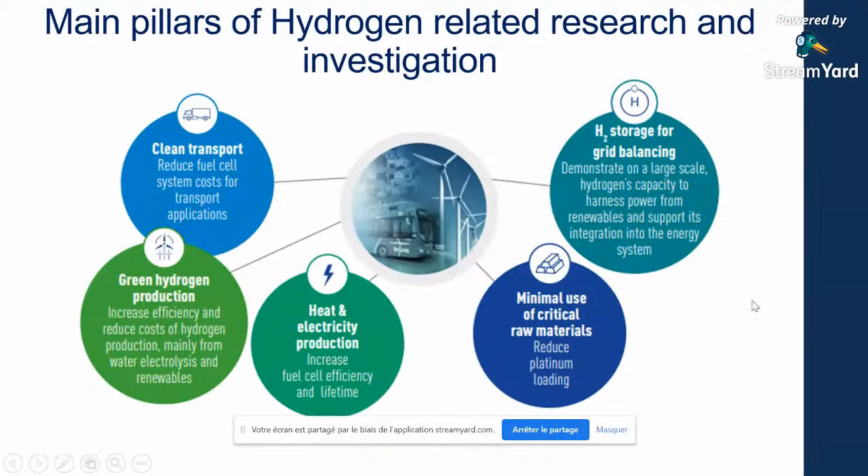So in this webinar, you will see different uses of hydrogen. I will start to introduce in this first part of the webinar a framework overview of renewable energy integration and green hydrogen as a long-term storage. And then I would like to present to you an overview of green hydrogen projects. So let's start with the framework overview.

As you know, in order to achieve the 2 degrees goal, the renewable energy integration will be expanded. There are some studies that are showing that the renewable share of global power generation is expected to grow to 86% in 2050, mainly coming from PV and wind.

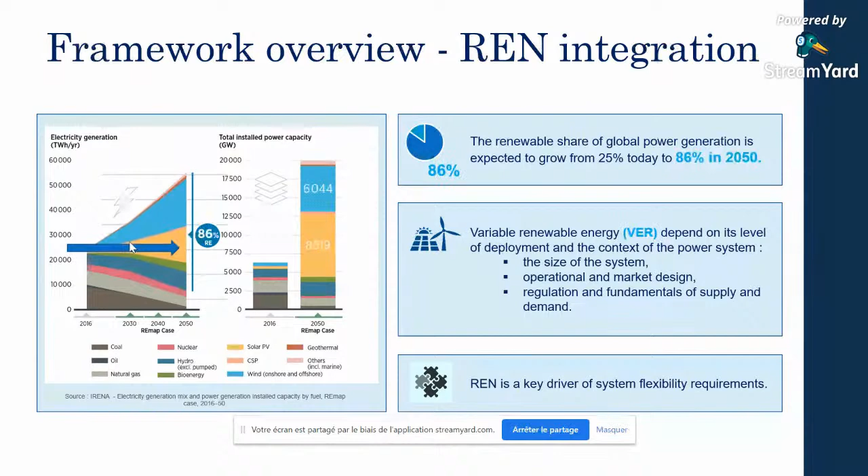And this variable renewable energy depends on its level of deployment and the context of the power systems. For example, the size of the systems, operational and market design, regulations, and fundamentals of supply and demand. So as you can see, we have a new challenge to face in order to support the renewable energy integration.

So there are some studies that propose to categorize the renewable energy integration in 6 phases, where in phase 1 and 2, there is not expected a huge impact, but after phase 3, we need to invest in flexibility to prioritize the different measures to support these systems and to identify relevant challenges and implementation appropriate to these measures.

For example, there are some studies that are showing that countries that are already in phase 3 are presenting a renewable energy surplus in some periods of time, for example, during spring, of 25%. So really we can see that it's important to start to take actions over this kind of process. But how can we act?

Well, as you can see, if we increase the renewable energy integration, we will be advancing in the different phases where we need to provide flexibility. But sometimes we are talking about hours, days, or sometimes we are talking about months or years. So depending on that, there are different levels of decision making that I would like to present to you in these 3 words. Who is the typical decision maker, for example, energy minister or system operators?

How is the category of the intervention, for example, policies that are making market regulations. And finally, what can we do? How can we do it? It is with different assets that we are going to act. And it is here that I would like to present to you the concept of energy storage. And I propose to you in this webinar to focus on this part of what.

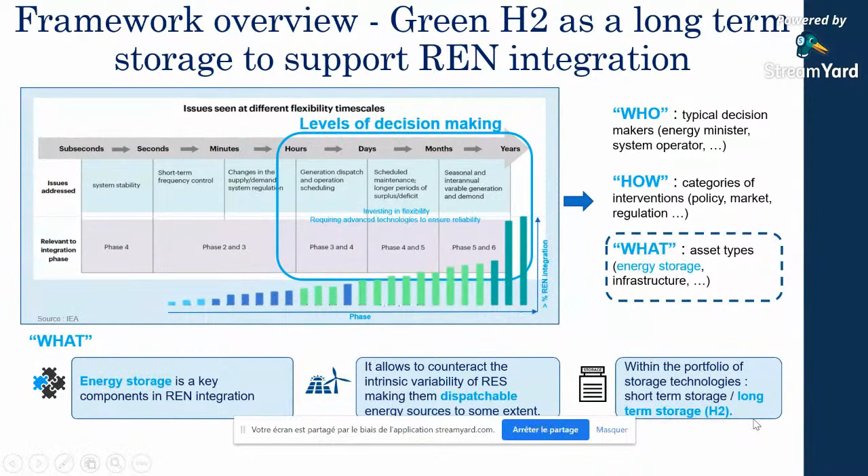And it's here in long-term storage that I would like to present to you the part of the hydrogen. So let me introduce you to this picture. You can see that you have different technologies that you can utilize in order to store energy. If we are talking about seconds, minutes, and hours, you can see that clearly you can utilize batteries. But if we are talking about weeks or months, we can utilize hydrogen as a long-term storage.

Long-term storage of a large surplus amount of electricity requires a new type of storage, as you can see, and we are introducing concepts of chemical storage in the form of hydrogen. Because of its relatively low specific weight and high energy density, hydrogen is an excellent energy carrier. And it's really important to understand that, because some forecasts are showing that in 2050, hydrogen from renewable power will translate into 5% of the total final energy consumption.

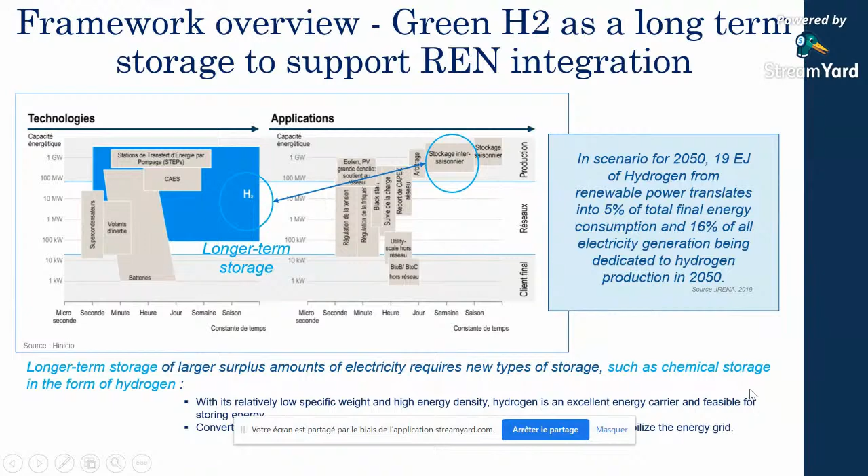So now that we understand the concept of hydrogen and green hydrogen produced from renewable energy, in order to valorize the renewable energy surplus, I would like to present to you a project overview of green hydrogen long-term storage. So we are going to discuss three aspects: technical challenge, hydrogen demand, and business model.

So in the first part, the technical challenge, we need to understand in which phase we are of variable renewable energy integration. After that, we need to understand the high-level system design that we are going to have. For example, how many megawatts of electrolyzer, how many watts we need to store from renewable energy, in order to optimize the electrolyzer running hours.

For example, here I can present to you a little example. Let's say that you have a system where the renewable energy surplus that you need to absorb is going to be a little bit over-dimensioned. That means that some part of the energy you will absorb in a short time in a battery during the day, for example, and you can also utilize it to feed the electrolyzer to produce hydrogen.

And during the night, for example, you can feed the electrolyzers with the battery and also with wind. And you can optimize the utilization factor of the electrolyzers during the whole year. And it is this profile of hydrogen production that you can see, for example, here.

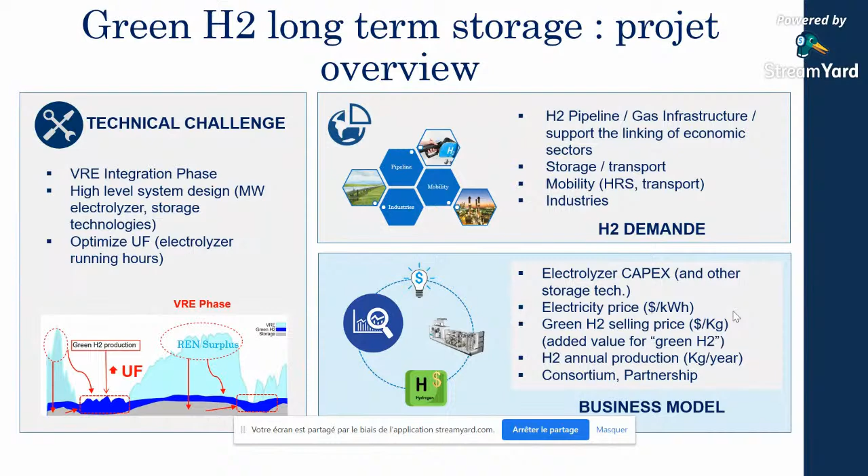In this case, this kind of process nowadays is supported by partnership consortiums or subsidies from the government.

So the key takeaway that I would like you to have in mind is that we are entering a world where renewables will make up an increasing share of our electricity. So the challenges are clear. We need to act in order to support renewable energy integration. We need to identify in which phase of these six categorizations we are in order to know how we can act. Hydrogen, with relatively low specific weight and high energy density, is feasible for long-term energy storage.

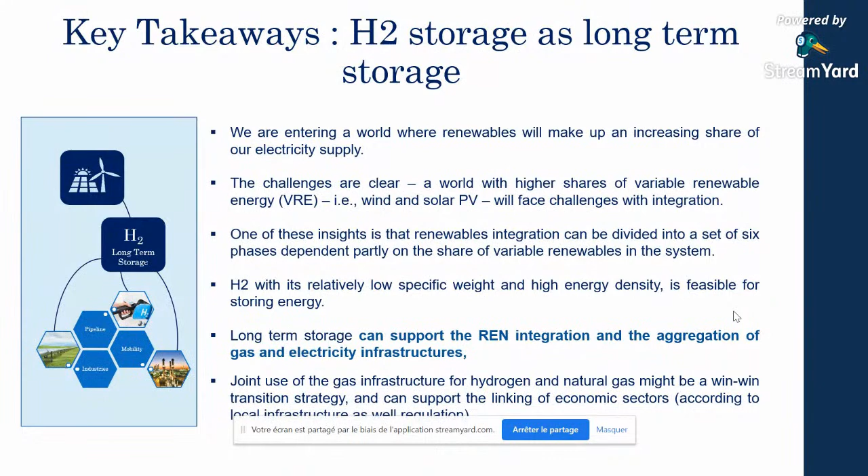As long-term storage, it can support renewable integration in the aggregation of gas and electricity infrastructure. And finally, joint use of the gas infrastructure for hydrogen and natural gas might be a win-win in this energy transition. As you can see, there are many demonstrators starting to grow up, and I would like to invite you to visit these sources if you want to know more about this kind of green hydrogen project.

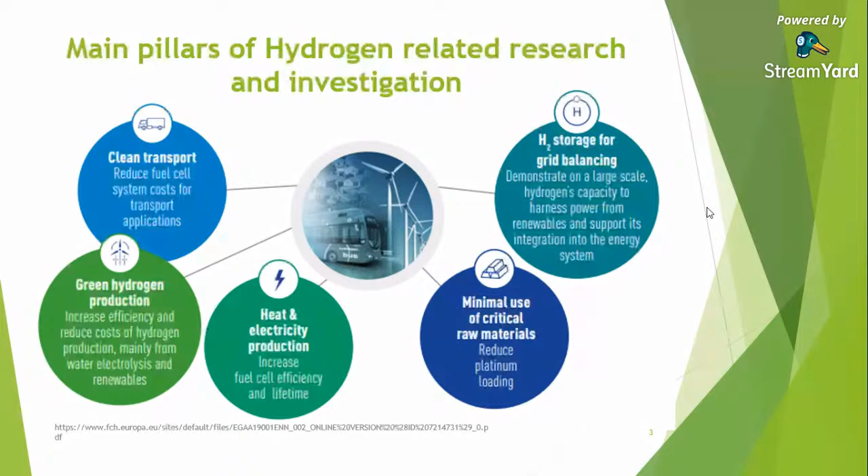As Rocio presented before, there are some main pillars of hydrogen-related research, investigation, and of course applications. I'm going to focus now on two pillars, clean transport and heat and electricity production. The other topics were covered by Rocio already and Fatima in the previous webinar. So let's start with the transport pillar: cars, buses, heavy duty, and all related refueling infrastructure for fuel cell vehicles, material handling vehicles, maritime applications, train applications, and planes. I will give you small examples of each of these applications and how they are actually working in the world.

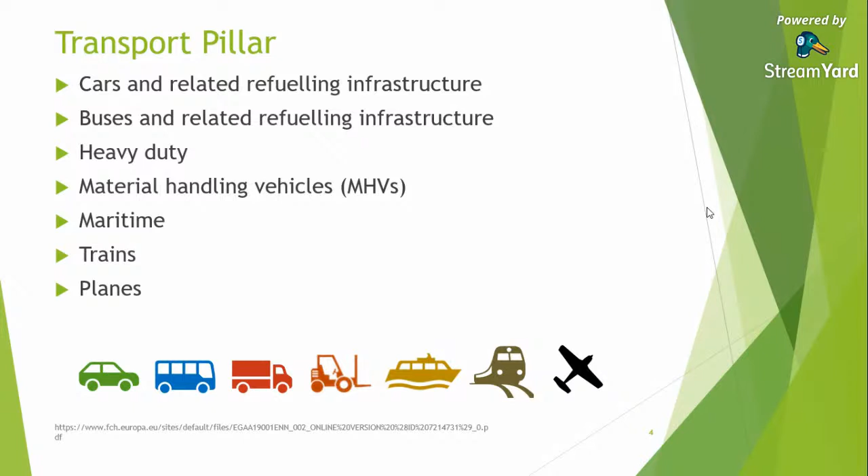Related to the transport pillar, many people believe that hydrogen is a competitor of electrical vehicles. In this graph, we have an overview of the range of application of each powertrain technology. Fuel cell, battery electric vehicles, plug-in hybrids are not competing with each other, but complementing each other to fulfill the full range of applications that have been fulfilled by fossil fuel vehicles. For a short range or small vehicle size, electrical vehicles have the most efficient operation, but for a bigger range or bigger vehicle size, you introduce hybrids or fuel cell vehicles.

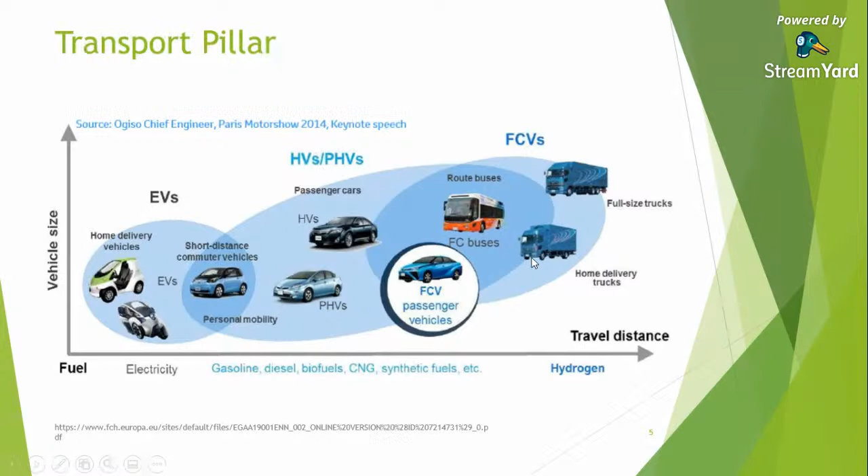Here we can see, as we discussed in the previous webinar, the competitiveness of the fuels. Here you can see the weight energy density and the volumetric energy density of hydrogen, batteries, and fossil fuels. If we talk volumetric energy density, fossil fuels are superior. But if you check the weight energy density, hydrogen has the better density. That's why we are betting on it. And for this reason, for big or heavy duty applications, hydrogen is quite competitive.

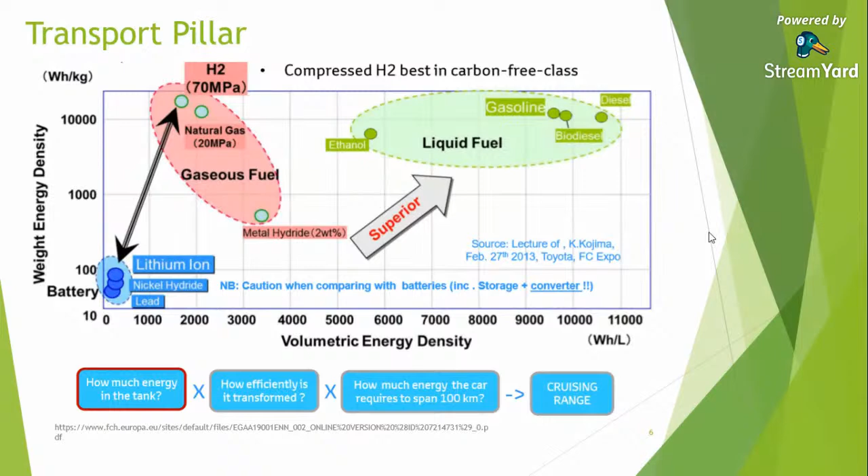A small overview of a fuel cell vehicle. This is the architecture of a fuel cell vehicle. It is not something that was reinvented. It's built on the hybrid architecture. The only difference is that we replaced the combustion engine with a fuel cell stack, and the gasoline or diesel tank with hydrogen tanks.

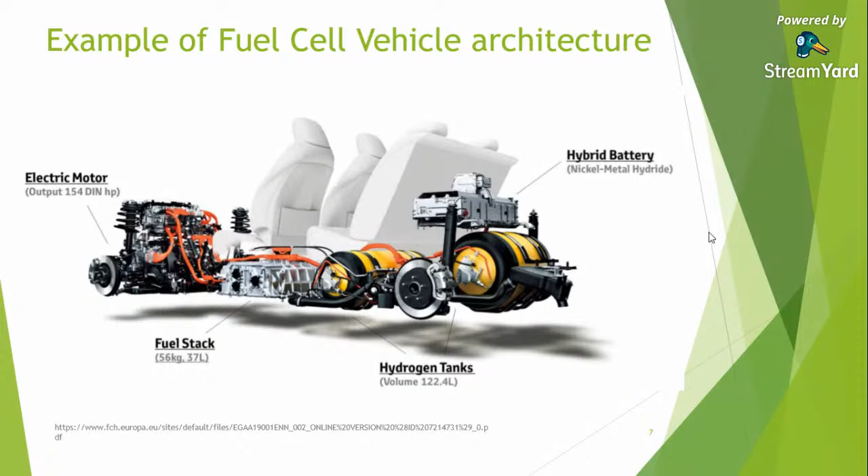Hydrogen infrastructure, all related to hydrogen refueling stations. This is an overview of how it's been accelerating for the past 5 years in countries betting on a hydrogen society. In 2015 there were already 40 hydrogen stations in California, 100 in Japan, and Germany had 50. The target for these countries in the years to come is to drastically increase the number of stations in order to deploy the technology faster in different parts of the world.

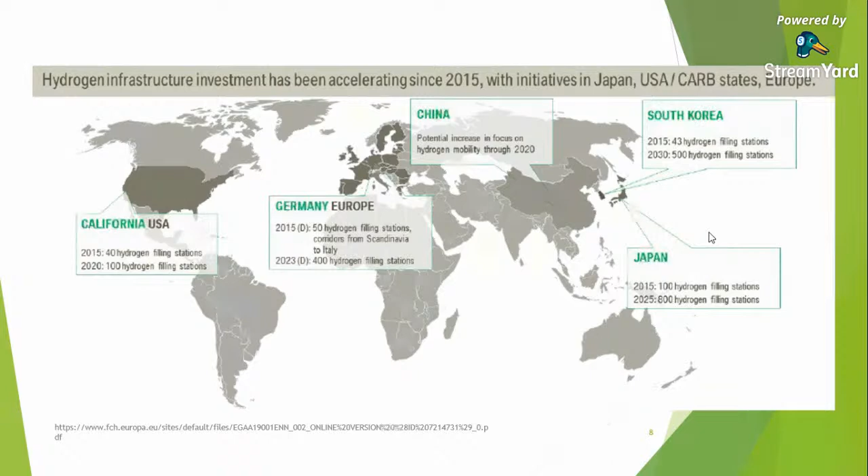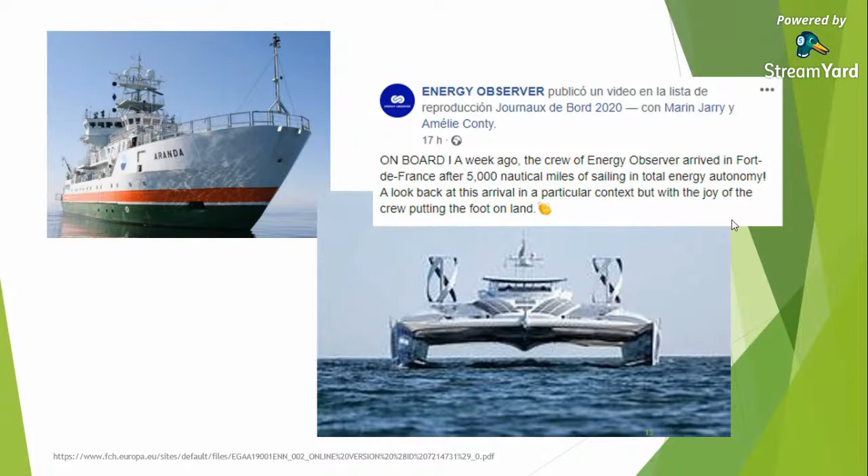Okay, so that was the transport pillar. Maybe I forgot to show the train, but there is currently also a train, the Coradia train in the Netherlands. It's by Alstom. It was released past March 7 to the public. It has been tested on the rail, and the performance of this fuel cell train is the same as the performance of traditional trains. So it's again ready to work and to compete with the existing technologies.

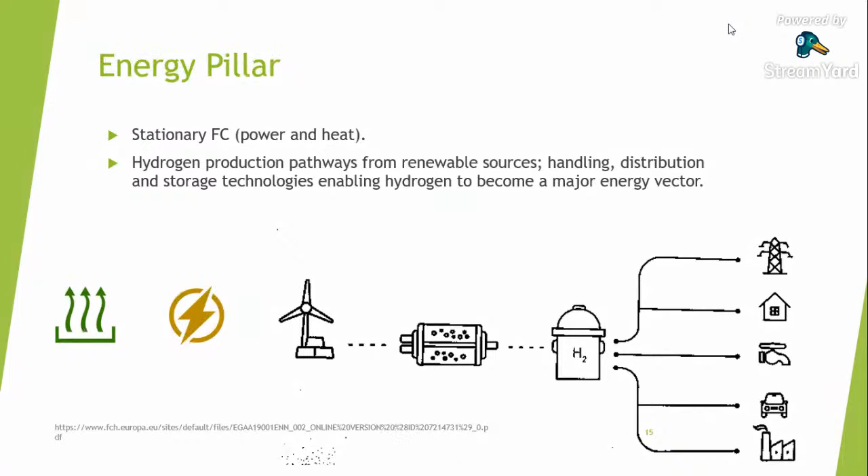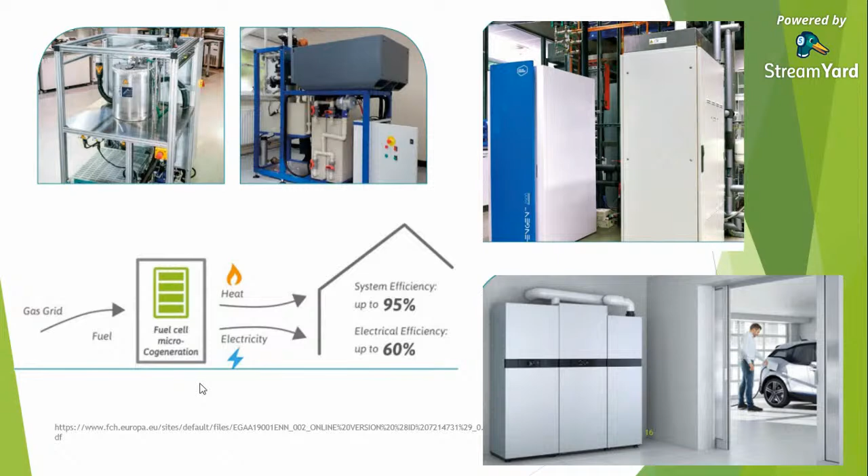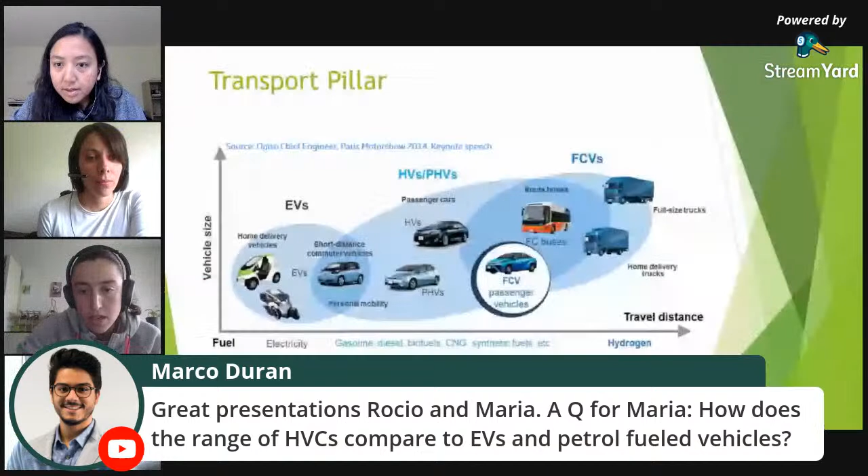So fossil fuel vehicles and all the applications were covering all these ranges: short distance, long distance, small vehicle size, and large vehicle size. So all these new technologies that we present here, electric vehicles, hybrids, plug-in hybrids, and fuel cell, they can cover together all what we were doing before with the fossil fuel. Okay. Thank you so much. So I hope that answers the question.

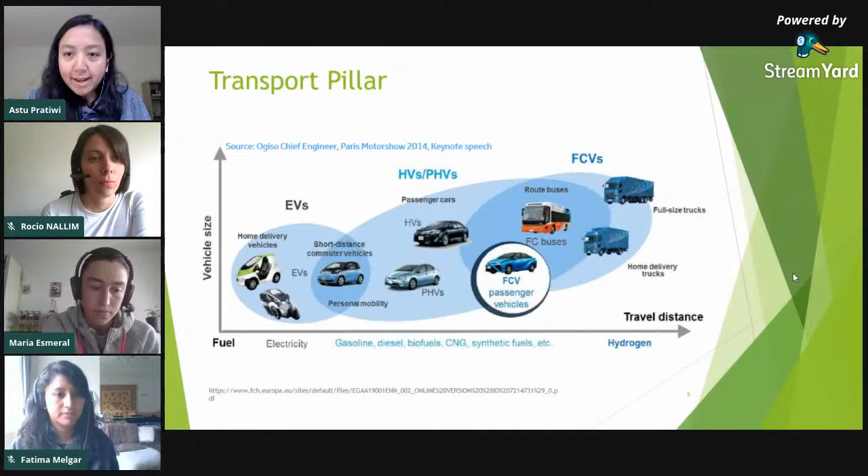And the next question we're going to take is from Himalaya Bir Shrestha. In case of passenger cars, I think the capex and cost of hydrogen makes fuel cells less effective than the battery. And vehicles, what is B? Okay, you guys know better than this. Maybe you can explain. And how do you see the future of FCV in light duty vehicles? What is BEV and PHEV? Battery electric vehicles and plug-in hybrid electric vehicles.

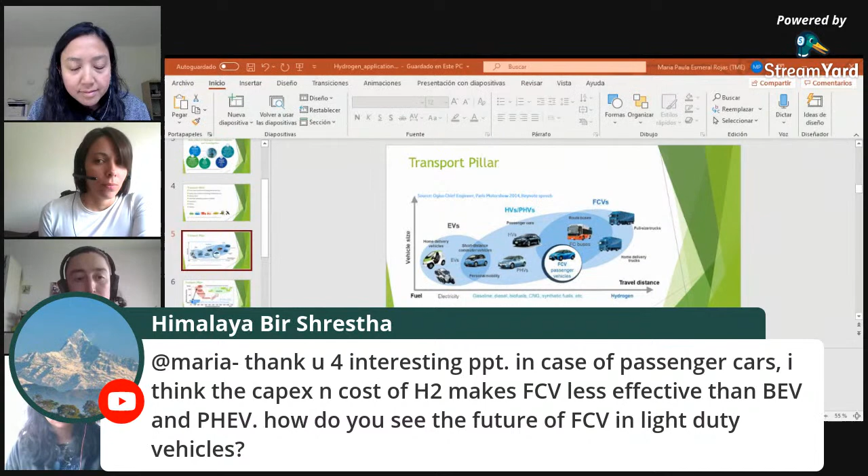Okay. So the future, yes, fuel cell vehicles in light duty: as batteries keep developing and maybe become less heavy and occupy less space, electric vehicles will be more powerful in light duty vehicles. But in heavy duty, for example, they cannot compete with hydrogen. That's why I think mainly in the future, hydrogen, my personal opinion, will be for heavy duty and, for example, bus type of applications. Yeah, it has more competitive advantage on that side.

Exactly. And it's because of the volumetric density of the hydrogen. You have space in the trucks and the buses to store a lot more than in a car. True. Okay, thank you so much.

We are going to take questions from Nikita. How is the conversion efficiency with hydrogen storage compared to battery storage?

Conversion efficiency. So conversion efficiency, I think, is conversion from the storage to the electricity? Yes, maybe. In fuel cells, we are at like 60-70% efficiency. Honestly speaking, for batteries, I don't know what the conversion is. Okay. So 60 to 70% for the fuel cell. Yes, that's the efficiency.

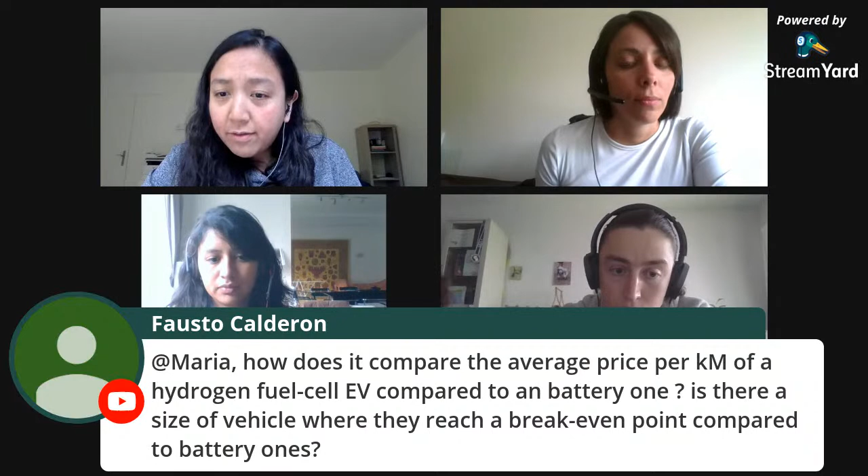Okay, I will take another question, again from Fausto, and the question is for Maria. How does the average price per kilometer of a hydrogen fuel cell EV compare to a battery one? Is there a size of vehicle where they reach a break-even point compared to battery ones? For sure there is a size at which they achieve that break-even point. I don't have the numbers. I'm more on the technology side than the price and economics of electricity prices and hydrogen prices. So I don't know exactly which is cheaper and in which ranges. But of course, there is a break point at some range or vehicle size where one becomes more efficient or more applicable than the other.

Okay, maybe related to this question, I would also be interested to know, in countries where they already have hydrogen refueling stations, do you have any idea how the price was set? Right now, the price is around 10 euros per kilogram. Per kilogram? So it's not per liter, because per liter is for diesel. Yeah, hydrogen we manage in kilograms. Yeah. Okay.

By the way, if other speakers have comments or want to complement the answers, feel free to shout. And we are taking the next question from Frank.